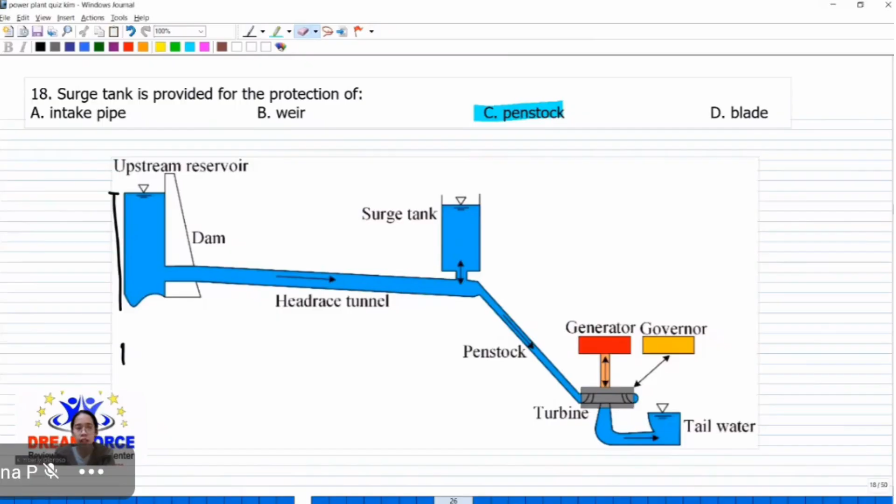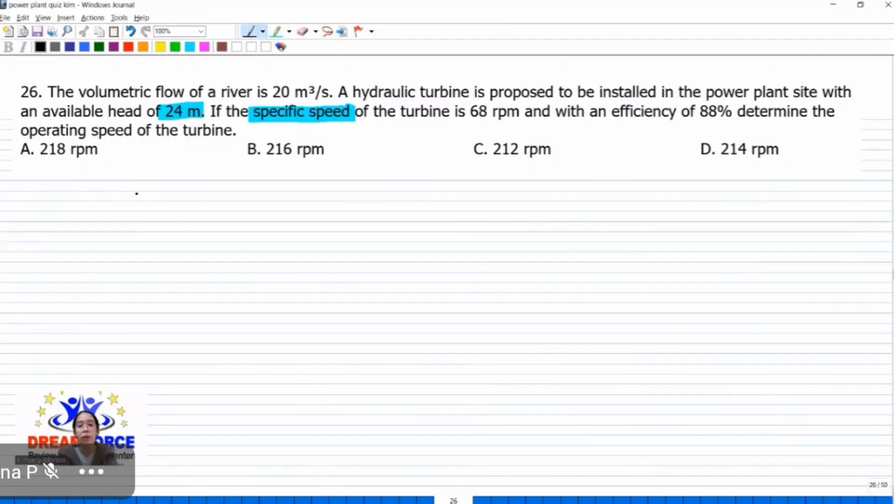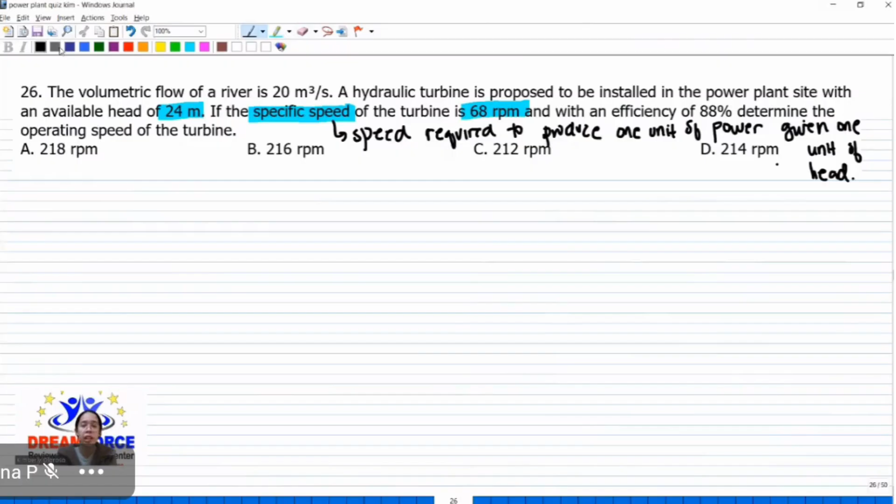Specific speed - we have an additional value here. Specific speed is the speed needed or required to produce 1 unit of power given 1 unit of head. That's specific speed: speed needed or required to produce 1 unit of power, so kilowatts or horsepower depending. Given 1 unit of its head - could be 1 meter or 1 foot. So for example, 68 RPM is the speed of your turbine needed to create 1 horsepower given 1 foot of head. That's our specific speed.

Now the question here is to determine the operating speed. So specific speed is different from operating speed. The operating speed is the actual speed of our turbine. The specific speed is like a constant, since it's defined - 68 RPM is needed to produce 1 unit of power. It's like a reference or basis, that's why it's called specific speed.

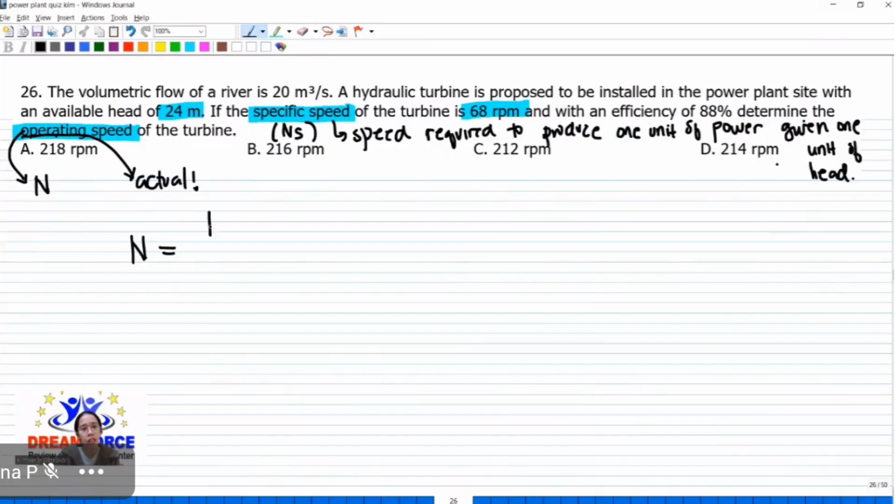So what's the relationship of specific speed to actual speed? Let's call it N, and NS is the other one. So we have this formula: actual operating speed equals NS times the head (converted) divided by the square root of the horsepower output. That's what we need to get the actual operating speed.

Let's see, what's still missing? We have NS, we have the head, 24 meters, check that too. What's missing is the horsepower output. How can we get that value using its efficiency?

Remember, for hydro, our overall efficiency is output over input, which is Q times specific weight times height, right? So this is 88%.

Output - where is our output? We need to find the output. So Q is 20 cubic meters per second, specific weight is 9.81, and head is 24 meters - all in SI units already.

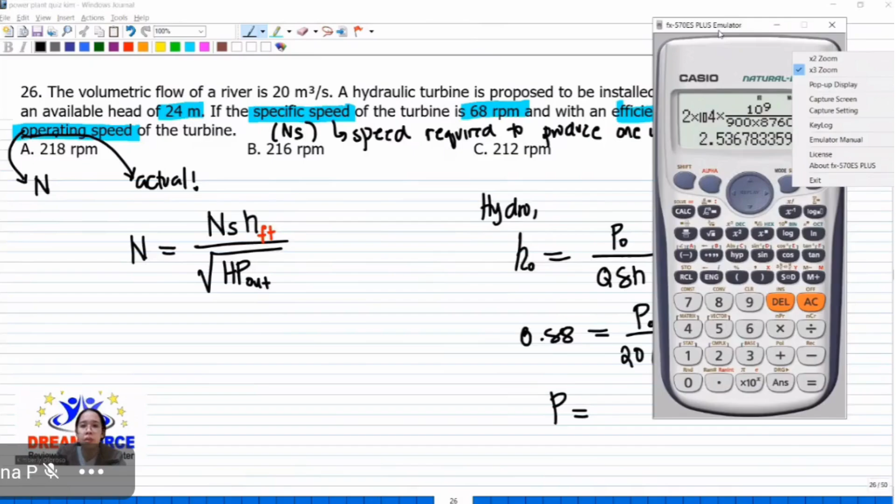So what is our power output? This is 0.88 times 20 times 9.81 times 24. So we have 4,14...

4,143.744 kilowatts. Okay, since what we need is HP specific, we need to get HP because that's what fits. 0.746 kilowatts is 1 horsepower, so let's just divide. So we have 5,554.62 horsepower. Okay, we're ready now.

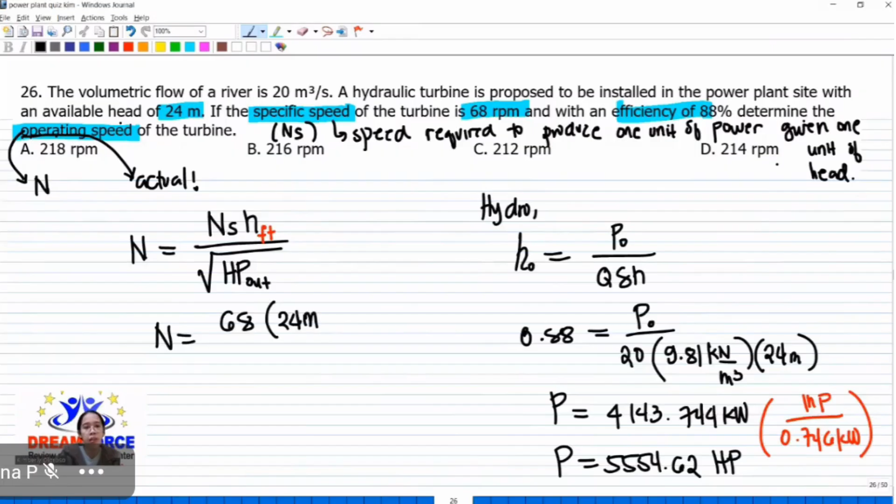Let's substitute. This is 68 RPM, and the head must be converted - 24 meters, convert this. 1 meter is 3.28 feet. Let's divide by the square root of the horsepower, 5,554.62.

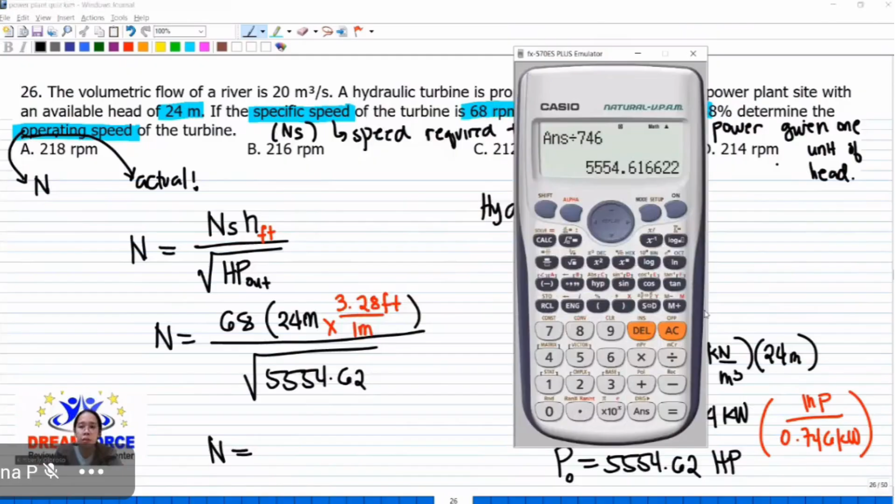And then, we're ready to solve for the unknown N. So we have 71.82... that's wrong, let me put it here. Square root of 5,554.62...

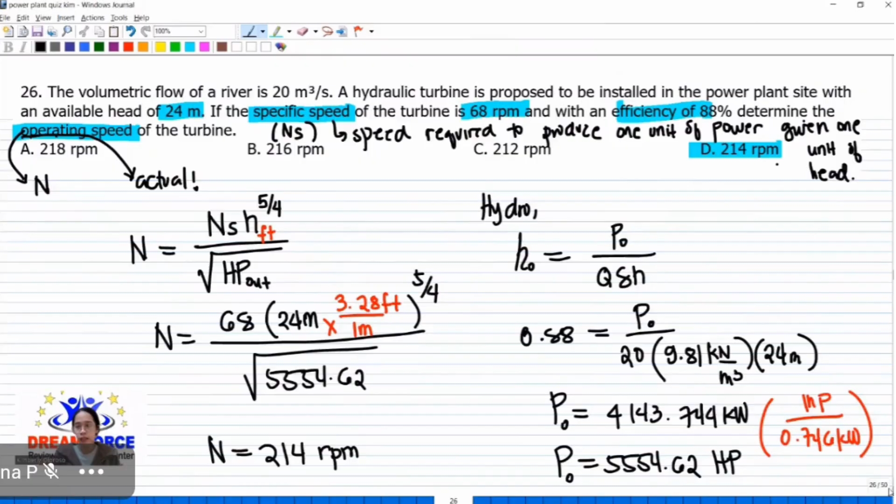Okay, next, number 27. A generating station has a connected load of 43 and a maximum demand of 20.

Units generated being 61.5 times 10 raised to 6. Calculate the load factor. The load factor is the ratio of average load over peak load, right? So peak or maximum load is already given. That's the peak or maximum. Now for the average load - first figure out what kind of load factor this is.

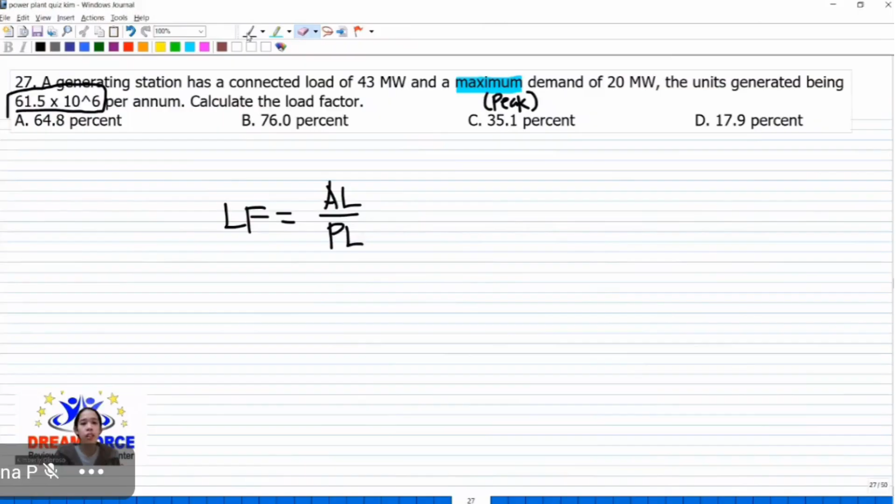Since the energy, units generated of 61, is so large, maybe that's per year. So it's annual - annual load factor. It's that large, in millions. So it's an annual load factor, which is annual energy - that's the 61.5 - divided by 8,760 hours in a year.

Divided by peak load of 20 times 10 raised to 6. 20 megawatts - let's just substitute. 61.5 times 10 raised to 6 kilowatt-hour, even though the unit wasn't written.

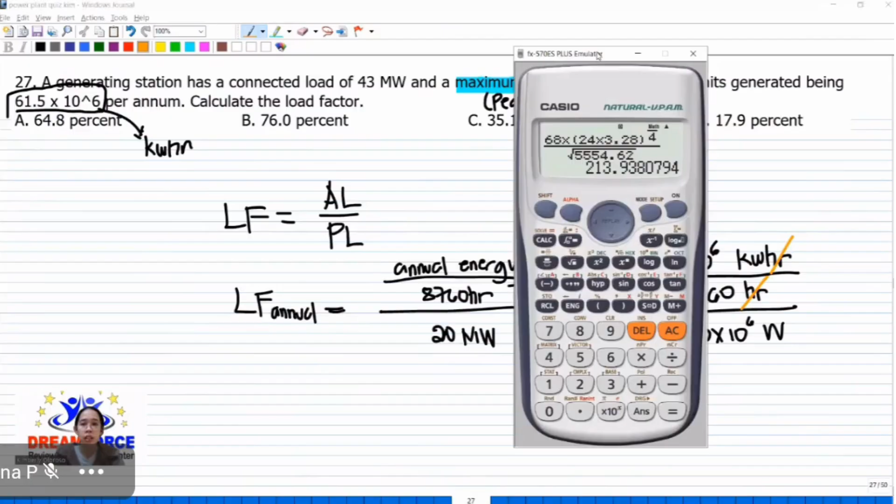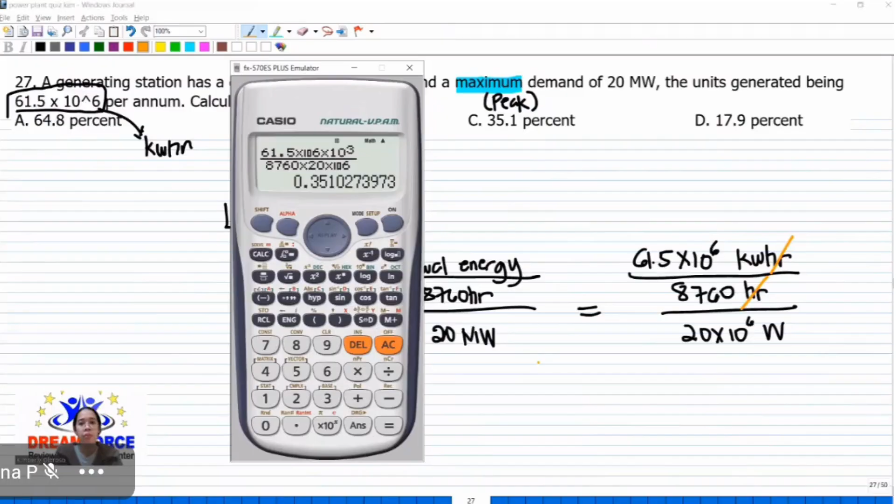So, cancel yung hour tsaka R. Ilan nga ba to? Let's type. 61.5 times 10 raised to 6 times 10 raised to 3, kasi kilowatt, divided by 8,760 times 20 times 10 raised to 6. So we have 35.1 load factor. Factor annual is 35.1% or 0.351. Ang load factor, para yan sa efficiency, hanggang 100% lang yan. So the higher the load factor, the better, mas makakatipid. Letter C.

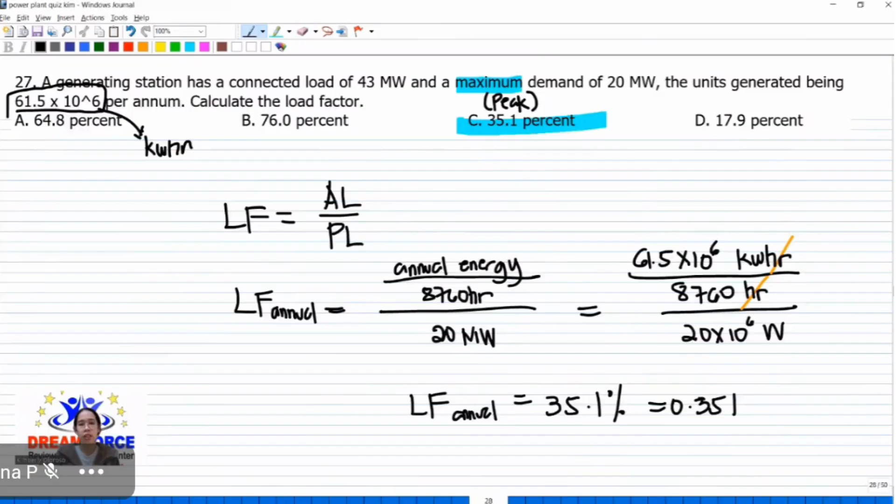Okay, next, number 28. Tsuran nyo na. Okay, same sa number 7, as in same na same, wala atang bagong given. Correct me if I'm wrong, 68 yung sagot. So may number 7 ko dito, check ko kung walang bagong given. 75%, 200 meters head, 100 megawatts. So same na same po sa number 7.

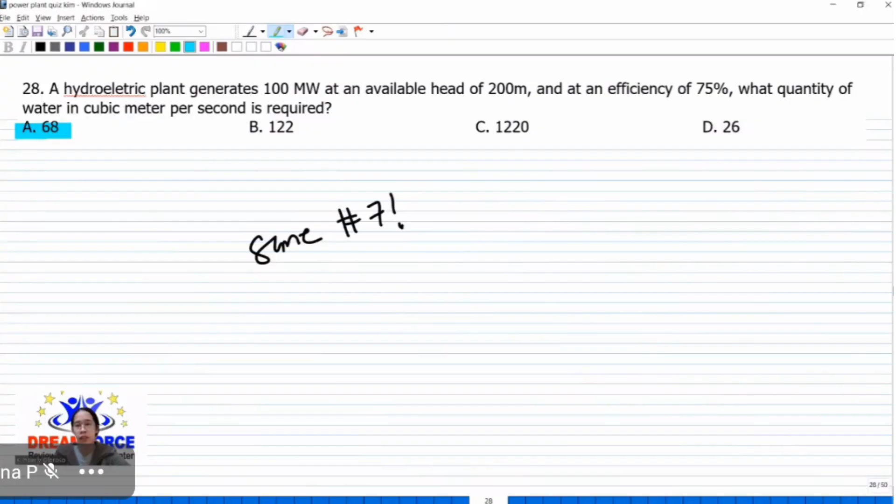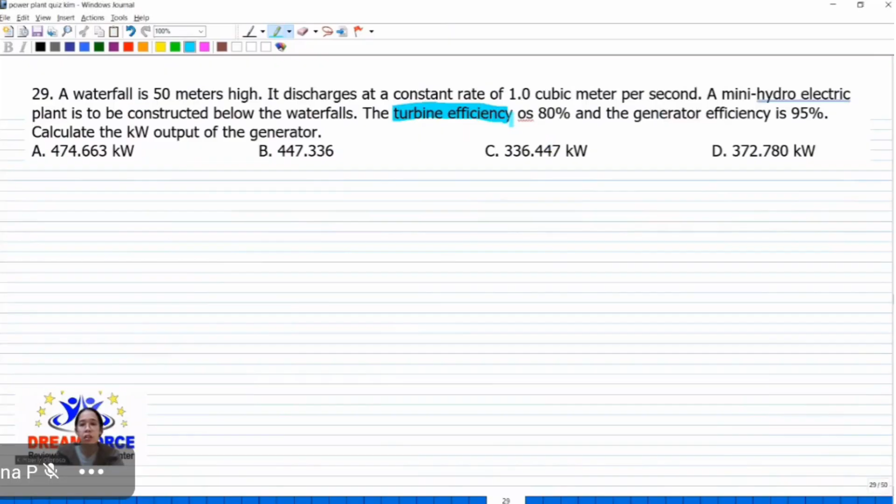Number 29 na tayo. Calculate the kilowatt output. Turbine efficiency, hydro na naman to, no? Kaya walang boiler dyan or thermal efficiency, wala namang sinusunog dito sa hydro. So turbine tsaka generator efficiency lang daw. Ito yung turbine natin, yung turbine connected sa shaft ng generator naman. So yan, bago mag-produce ng output, ito yung input natin, yung penstocks.

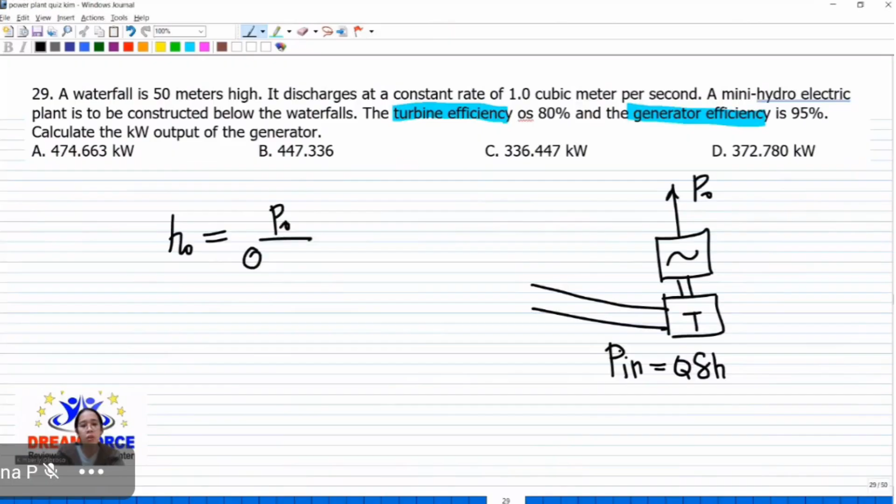So electrical, ay kinetic energy ng water. Okay, so what is the output of the generator? Overall efficiency is output over Q, specific weight, times the head. So alternator tsaka turbine ang given. We have 0.80 tsaka 0.95, diba? Product of all efficiencies. Output power is unknown. Given na lahat, I think. 1 cubic meter per second, 9.81 kilonewton, and then a head of, nasan ka head?

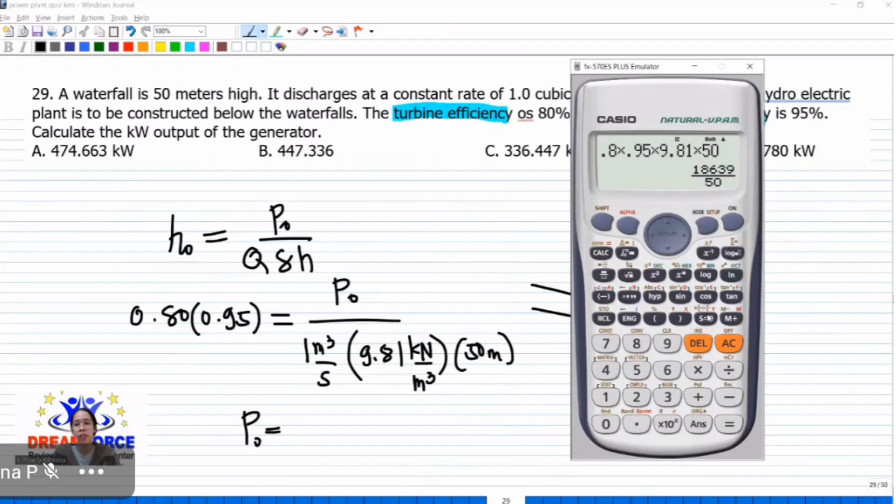50 meters high. Yan pala, direct substitution. Sana nakuha nyo to. 0.8 times 0.95 times 9.81 times 50. So we have output power of 372.78 kilowatts. Letter D.

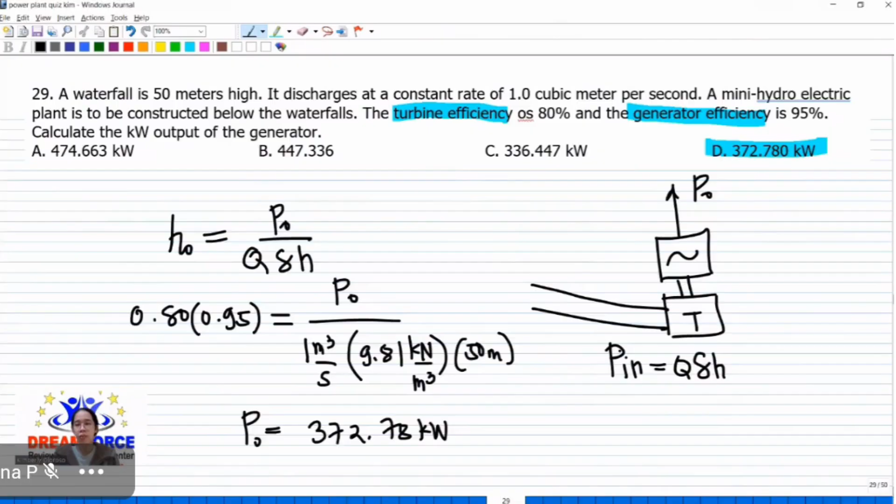Next naman, number 30. Ipa-picture na lang ulit. So you're almost done sa EE subjects. And yan, be excited na makakapag-refresher na tayo, yung marami ng pre-board. So be grateful na naabot yung hanggang dito. Kayanin na lang, mahirap talaga yung mga nauna nating EE. Pero kailangan natin pagdaanan, yan yung major natin. So tiyaga lang.

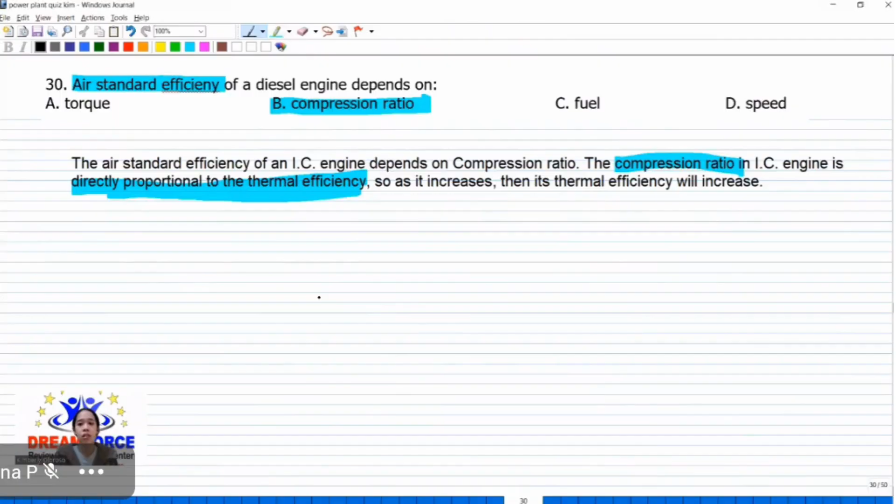30. Air standard efficiency of diesel engine depends on compression ratio. Kaya diba may sinusot tayo sa thermodynamics, yung compression ratio, ratio ng volume, parang ganun. So may note ako dito: the air standard efficiency of an IC engine depends on compression ratio. Natatandaan to, compression ratio is directly proportional to the thermal efficiency. Okay? So syempre, pag nag-increase ang compression ratio, directly proportional to thermal, kung nag-increase ang compression, expected thermal efficiency will also increase.

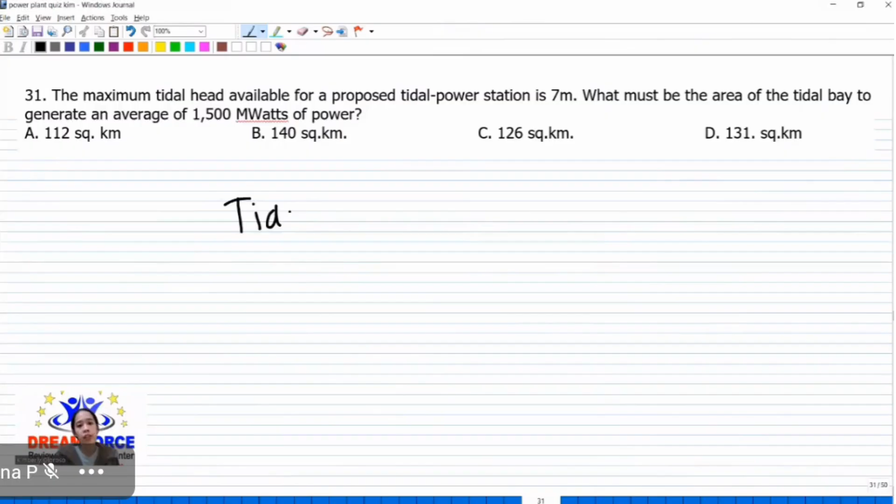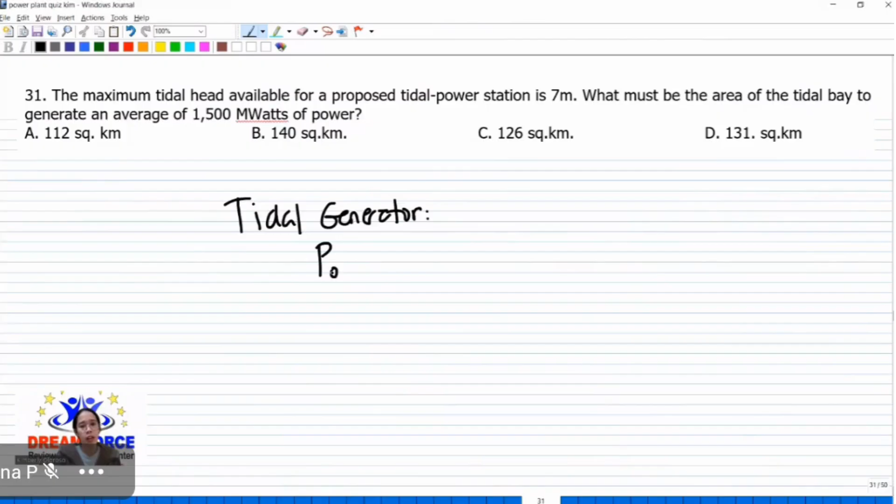Next, 31. Itong 31, nasa lecture din, binago lang yung given. For tidal generator, nga pala, na-picture nyo na to, picturean nyo na. Ito yung 31, di ba? Output power natin na naka-megawatts dapat is equal yan sa 0.219 area na naka-kilometer times H square na naka-meter. Naka-meter naman to, ayan, or AH square.

I think given lahat na, 1,500 megawatts, 0.219, unknown ang area. Ang height naman natin, naka-meters na siya, so 7 meter square. So yun na, you will get 139.8 or approximately 140 square kilometer. Letter B.

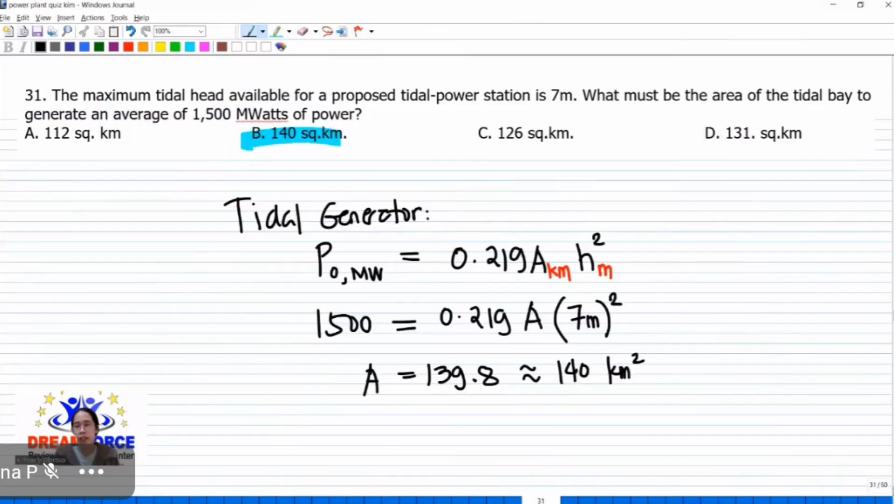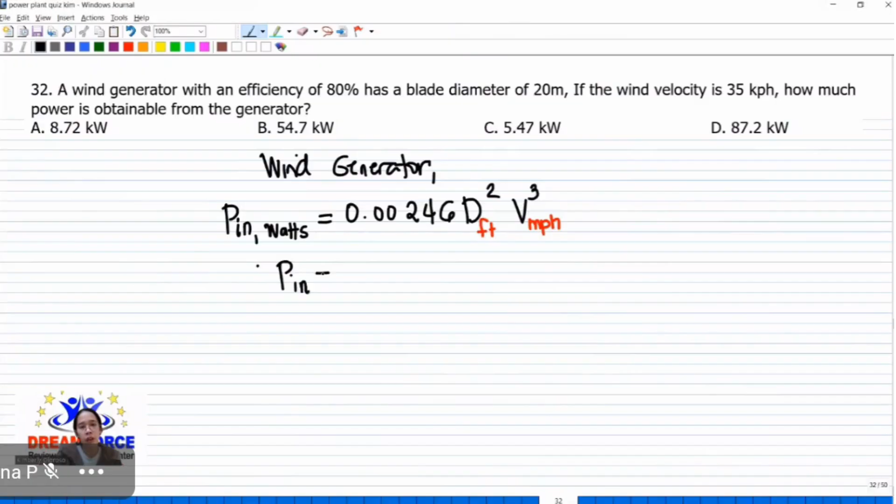0.00246, D square, tapos V cube. Pero ang diameter dapat naka-feet, tapos ang velocity dapat naka miles per hour, mph. Yan, miles per hour dapat. Direct substitution, no? So what is the input power? Solve muna natin yung input power na naka-watts. Diameter, 20 meters, so gawin natin tong feet. Saka natin square, cancel na po. And then yung ating velocity naman, 35 kilometers per hour. Ayan, so dapat naka-miles per hour, no?

So convert natin yung kilometer. 1.609 kilometer is 1 mile. Okay na, naka-miles per hour na to, mph. Miles per hour na siya, don't forget to cube. Okay, so paki-input sa CalQ, input power must be 108,963 watts.

Okay, so yan. So therefore, given ang efficiency, ang tinatanong is obtainable from, may from pa dito, from the generator. The output, yung lalabas na power sa generator, diba? Obtainable. So output pa rin yung pinapahanap. So output power is efficiency times input. No? So this is 0.80 times efficiency, 80%, percentage ko na lang, input of.

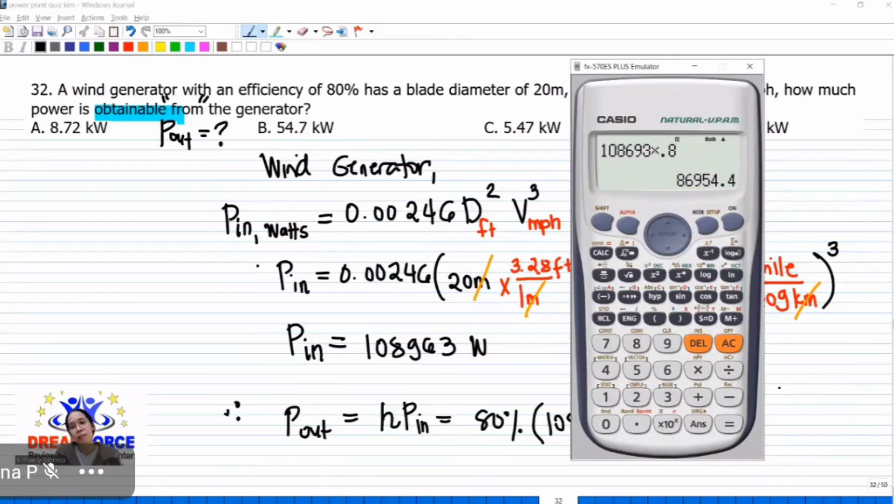108,693 times 0.80. So we have 87, 87.2 kilowatts. We have letter D. Letter D. Nasagot natin.

Okay, number 33. Yan, kapag nakuha nyo yung formula, baka nalimutan nyo. Tsaka yung mga to, fix siya, miles per hour. Fix yung mga yan, kaya meron kang multiplier dito na 246, kasi fix na yan yung unit na yan.

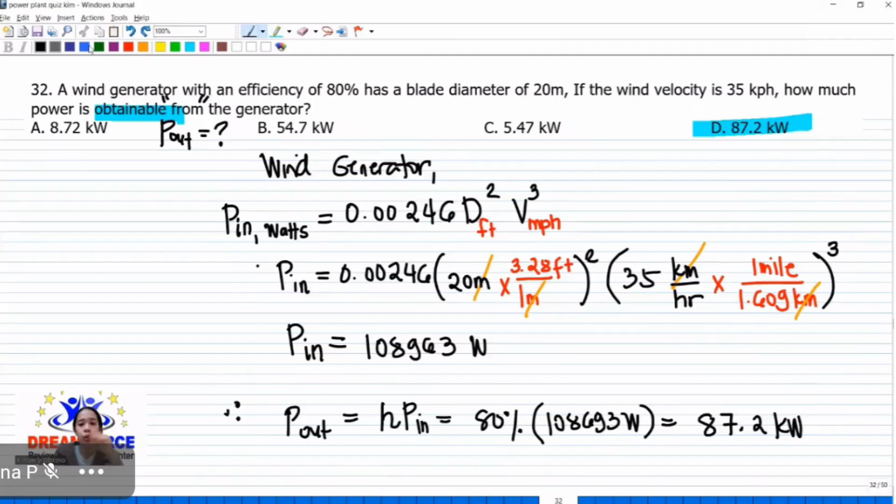33. In fission, energy is produced when nuclear particles split, syempre. And when each atom splits, a tremendous amount of energy is released. At yun yung kailangan natin para mapaikot ang ating turbine at makapag-generate.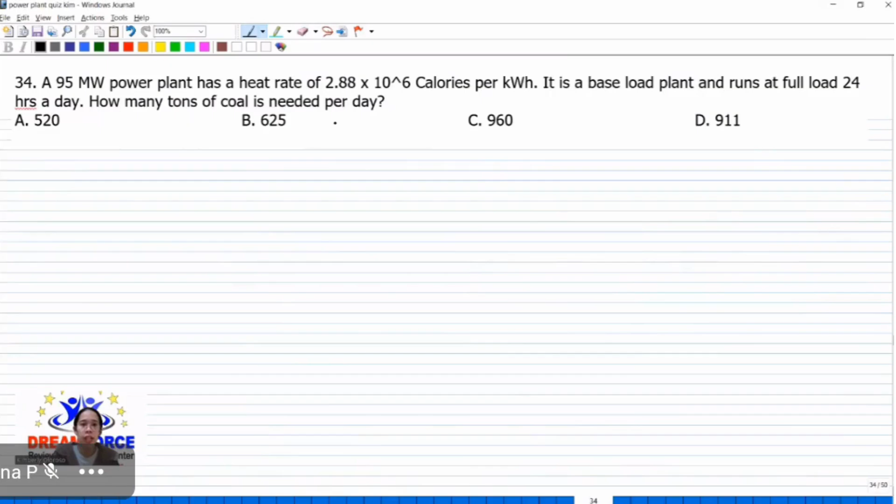Next, number 34. Subukan nating tapusin. How many tons of coal is needed per day? So given is heat rate, dyan tayo magbase ng formula: mH over P out.

2.88 times 10 raised to 6 kilowatt hour. Calories pala. And then unknown ang mass, no? How many tons, oh? So unit of mass. So mass times heating value, gagamitin natin dito.

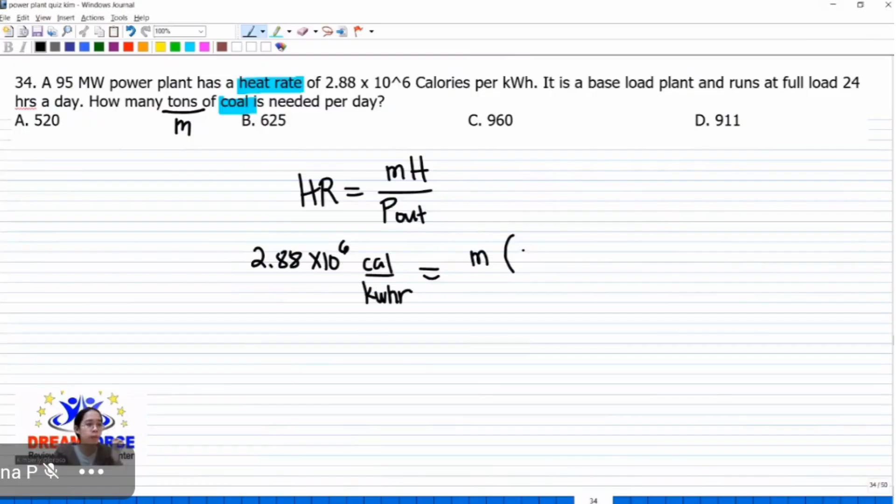Coal. Pag coal, kahit hindi binanggit, you can use 12,000, pwede rin naman 13,000 BTU per pound. Remember, ang heating value ng coal ranges from 12,000 to 13,000. Pili ka na lang dyan ng gusto mong value. 13,000 na lang kunin ko. Unti lang naman discrepancy pagka 12,000 yung ginamit nyo.

So divided by output power, 95 megawatt power plant. Okay, so yan yung ating output, di ba? Kung ano yung rating, rating kasi to o installed capacity ng planta. So malamang yan yung maaaring output na power na pwede niyang ma-generate or ma-supply. So yan yung ating output: 95 times 10 raised to 3 kilowatts.

At kung mapapansin mo, dapat same ang unit niya dito, di ba? So kulang ka pa ng R, so times tayo ng 24 hours, 1 day, in a day.

So ayun, magka-cancel na yung kilowatt hour pareho, both side. Make sure mag-cancel lahat bago ka mag-type sa calculator mo. Yung iba kasi nakapag-substitute lang, tinatype na sa calculator, mali-mali naman yung units. Ito, calories tsaka BTU, pag-cancelin mo rin yan.

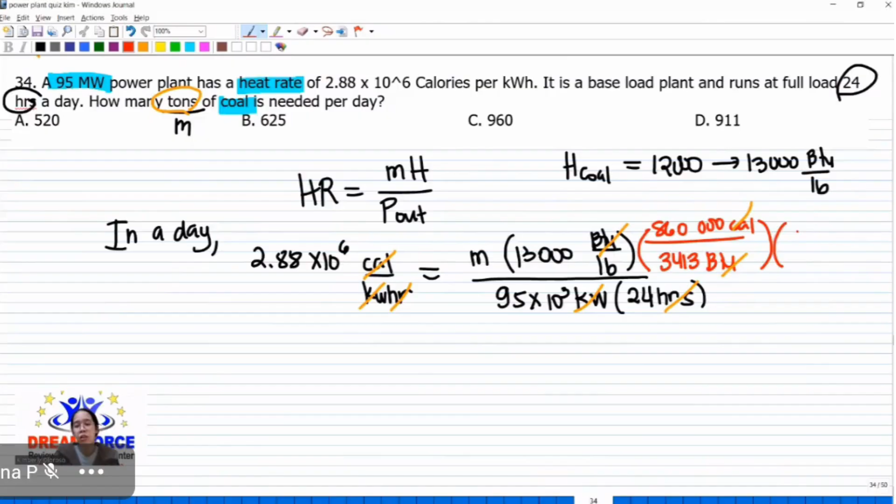3413 BTU is 860,000, 860 kilo or 860,000 calories. So cancel na to, calories doon, BTU at BTU. Tsaka i-target na rin natin final answer, gawin na nating tons: 2,200 pounds is 1 ton, para direkta na yung sagot natin. Pounds, pounds, so matic yung M, naka-tons.

So paki-type na lang, you must get 911 tons. Hindi ko na ita-type sa calculator, kayo na lang, para abutin natin yung dulo, kung kaya.

Ilan na lang bang solving to? So 7 na lang aabot to, sa loob ng 2 hours na lecture, at tatapos natin.

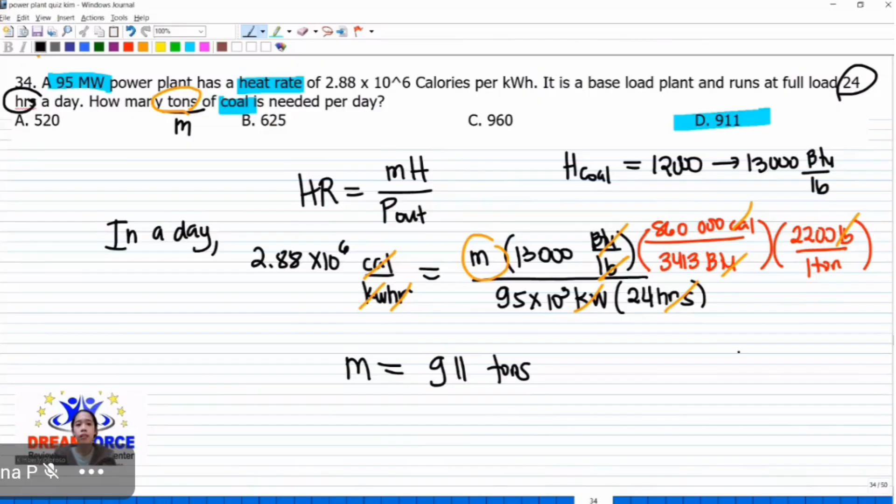A power plant consumes 21,542 kilos of coal per hour. Heating value as given, and the overall efficiency is 28. What is the output? So again, dalawa lang naman yan eh, magsosolve ka ng in terms of heat rate like ito, or in terms of overall efficiency, kasi inverse lang naman nila ang isa't isa, baliktaran lang nila ang isa't isa. So dito kasi given po ay overall.

Unknown output, mass of 21,000 per hour, sabi dyan ha. Then heating value, 6,652,800 calories per kilogram. Oh, unit analysis.

So this is cancel, cancel. Tapos ano pa ba? Ito, assuming na ang output power natin is naka-kilowatt hour. Unit of energy siya, unit of energy yung kilowatt hour, pero di ba madalas ang sinasubstitute natin sa output PO is kilowatt hour. Assuming yan yung unit niya. So may kulang pa tayong conversion, no?

860,000 calories is 1 kilowatt hour. Okay sige, kilowatt na lang, may per hour lang kasi ito, sige tanggalin ko na lang. Kasi ito na lang, yan na lang yung may per hour. Sige, yan na lang, solve natin to.

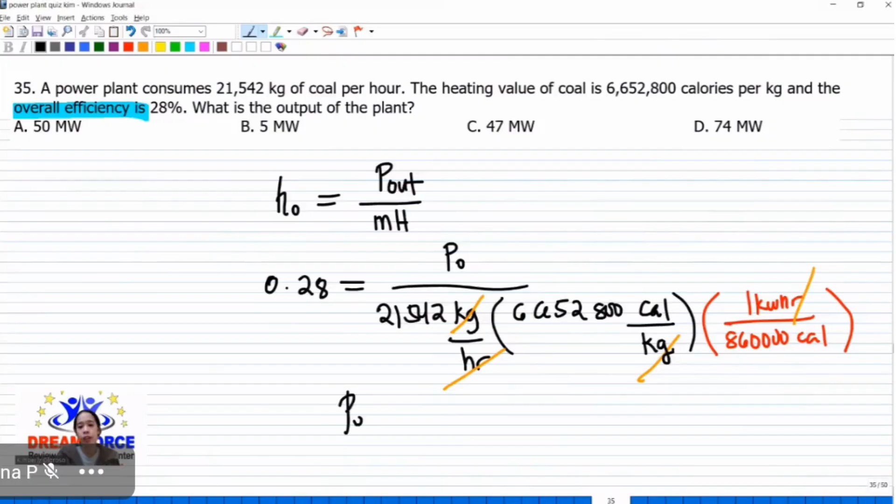PO, magka-cancel na nga pala to dito, yan R, tsaka R doon. So final answer ko is P output na naka-kilowatts, yun kasi yung natirang unit. So yung final answer ko is naka-kilowatts pa, tingnan natin kung anong sagot muna.

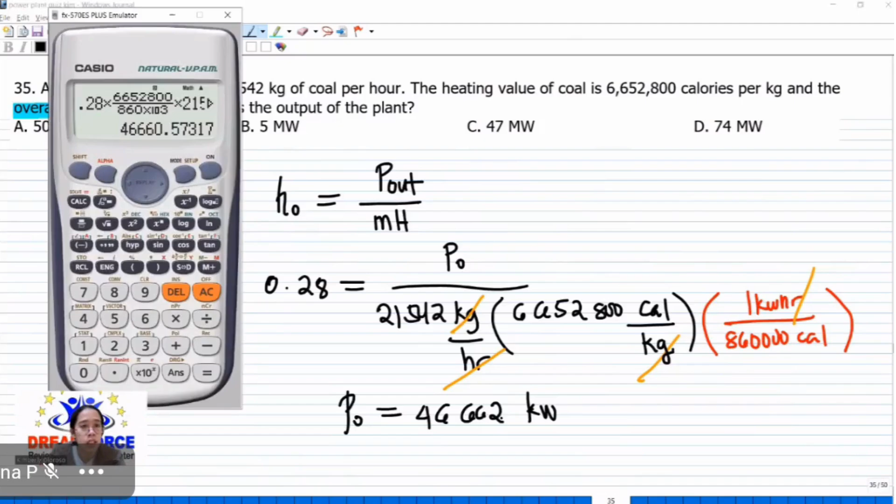28 times 6,652,800 divided by... so we have parang baba, times 21,542. Ayan, so 46,662... 46,661 kilowatts, or in mega, this is the same as 47. Yan yung ating answer.

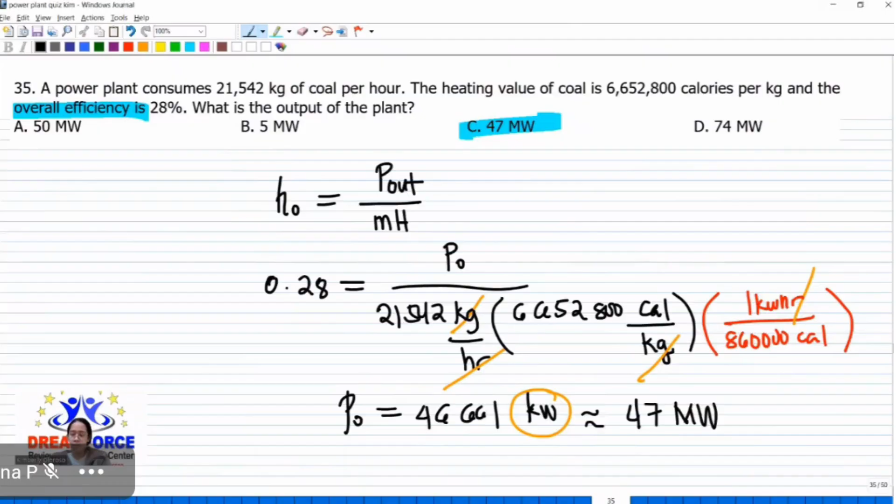Okay, next, number 36. If it refers to the capacity available, maintained, and condition to operate and take share of the load.

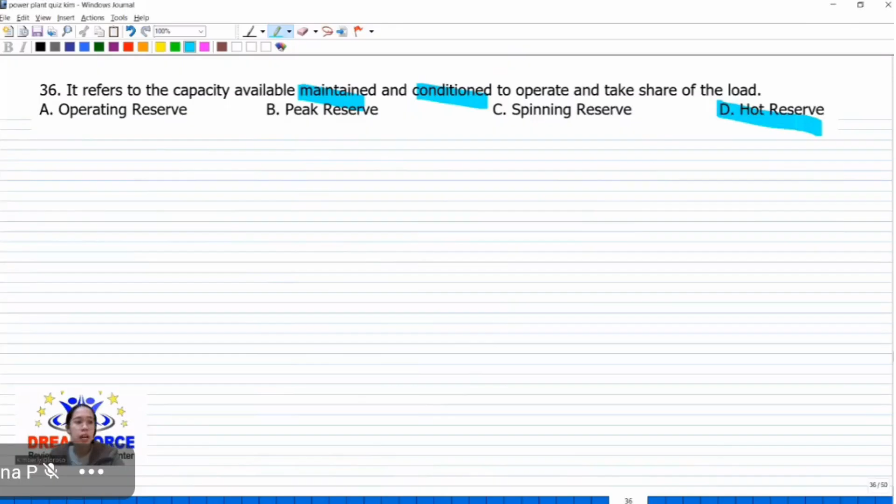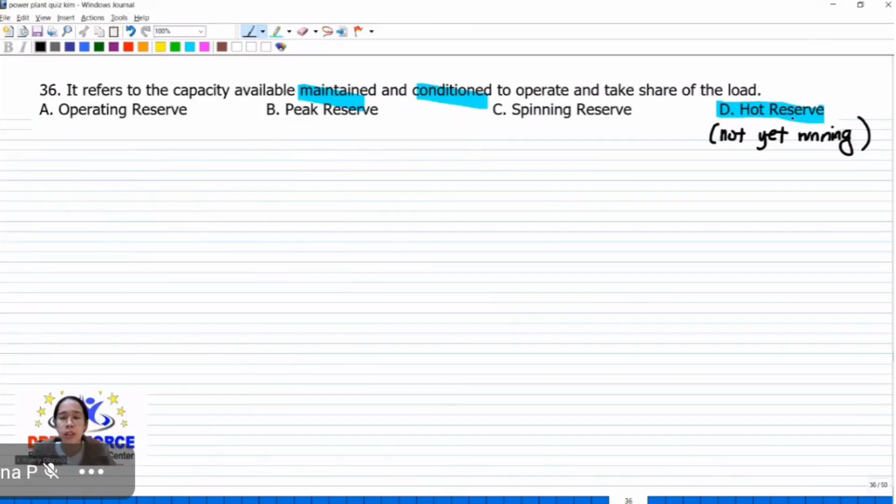So answer dyan is hot reserve. So inote ninyo, yung hot reserve natin is not yet running, siyempre papaandarin lang yan pag kailangan na ng backup, reserve or backup. Yung cold reserve naman, so ano naman ang kaibahan ng hot sa cold reserve? Lagay natin dito, in service na siya, in service siya but not in operation. Parang gulo, anyway, yan po yung definition niya.

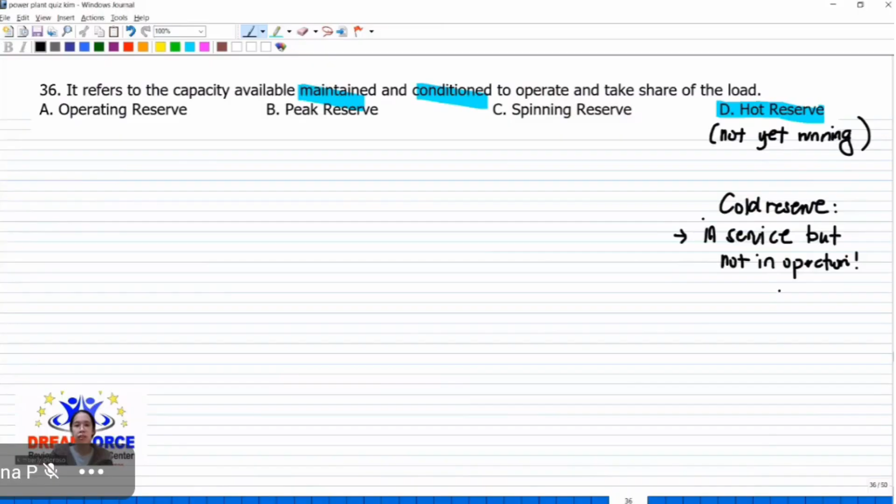To operate and take share of the load.